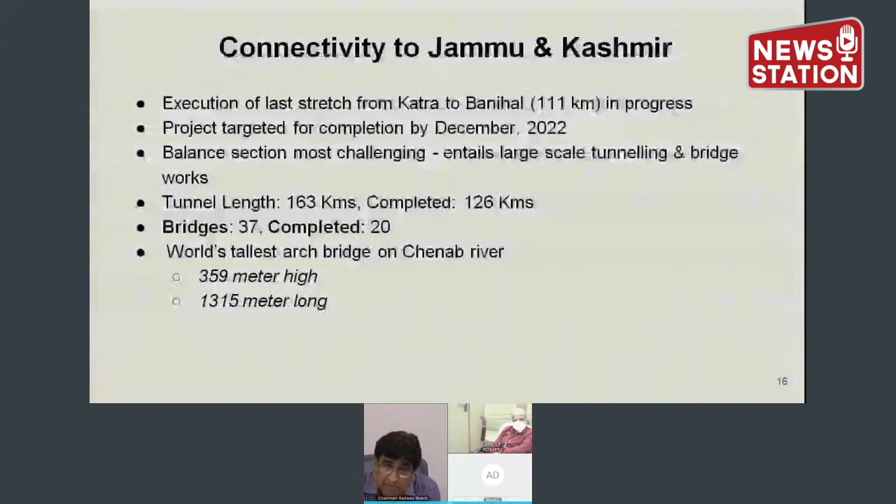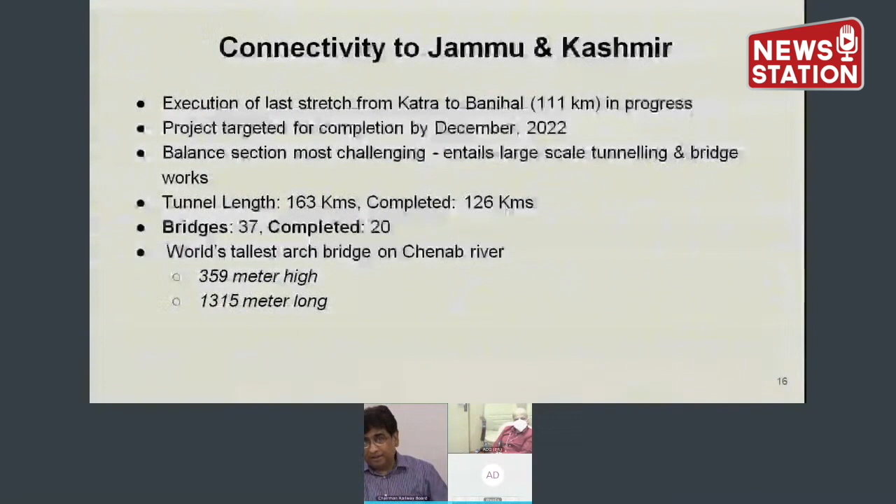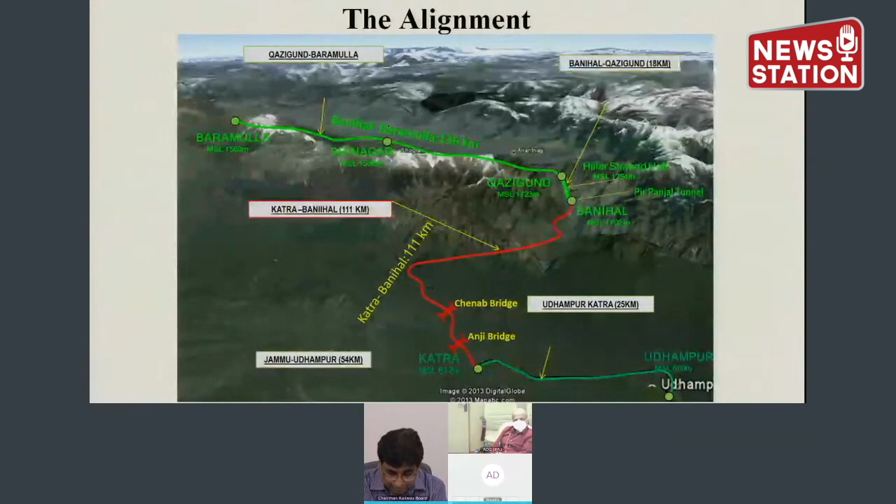And this terrain has two very important bridges. Once it is commissioned, the Chenab Bridge will become the world's tallest bridge, tallest arch bridge. It is 359 meter height, higher than the Eiffel Tower if you compare, and 1315 meter long. These are some of the pictures showing the alignment of the terrain, all hilly terrain.

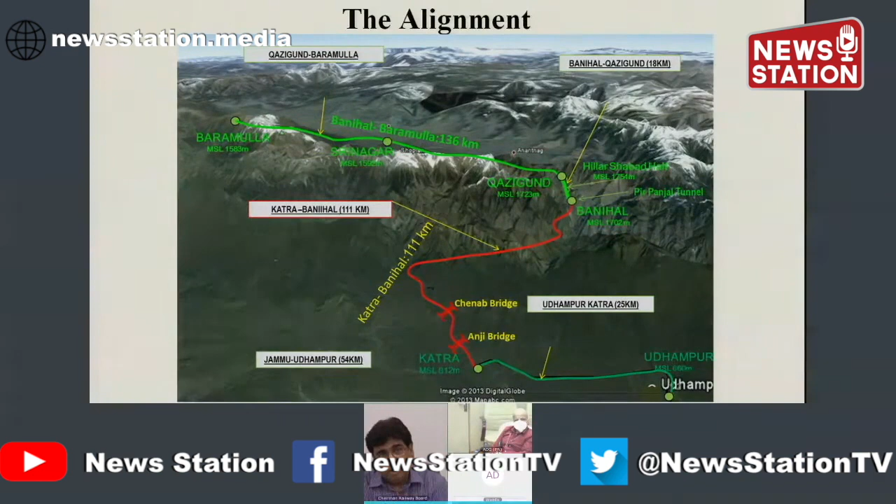The entire terrain is either tunnel or bridge. So 97 kilometer tunnel, you come out of the tunnel, you go to the bridge. You come out of the bridge, you go to the tunnel. So it's a very, very difficult terrain, but our Indian Railway engineers have done really marvelous work, and the project is going in full swing. These are some of the details that this work is going on.

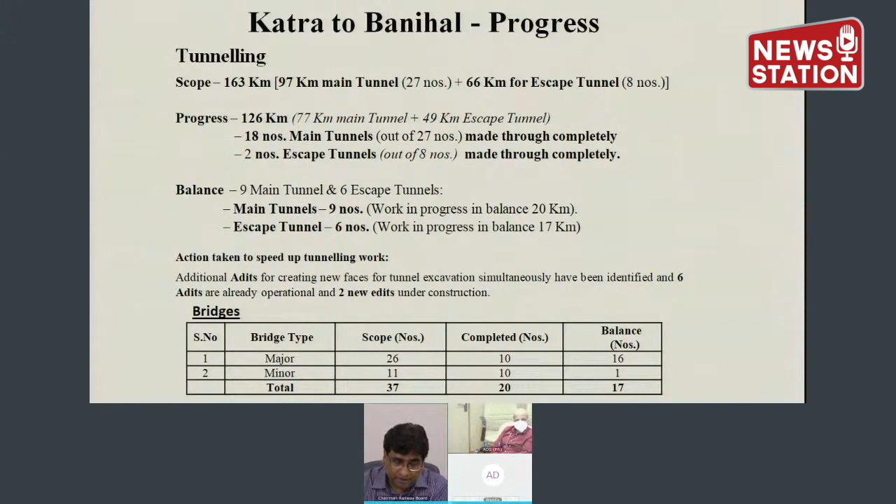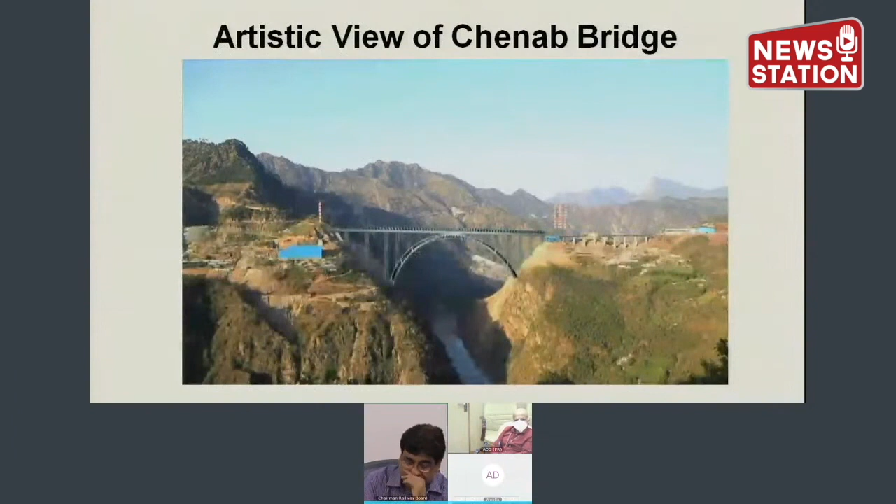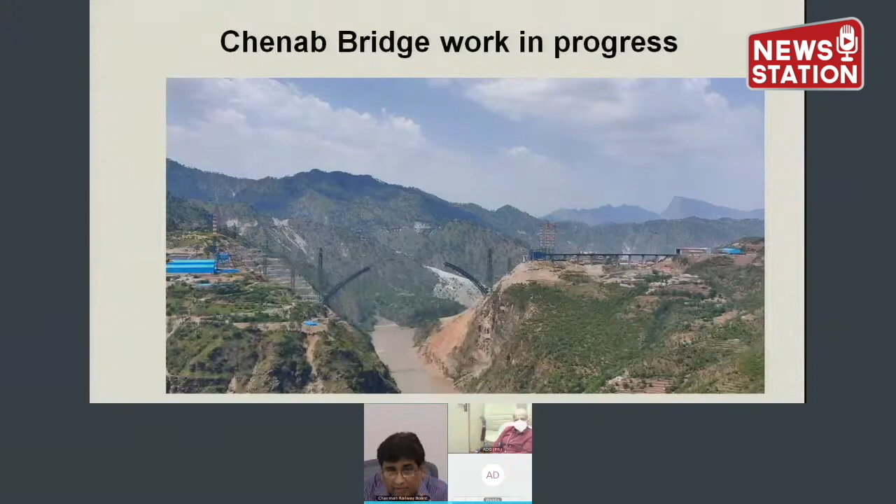And this is the view of Chenab Bridge. This is basically an artistic view. This is not the view at the ground right now, but it will look like this. And the next slide indicates the actual site work. Already a lot of work has been done. So this is actual site work, and it will look like what you have seen in the artistic view. This is Chenab Bridge work in progress.

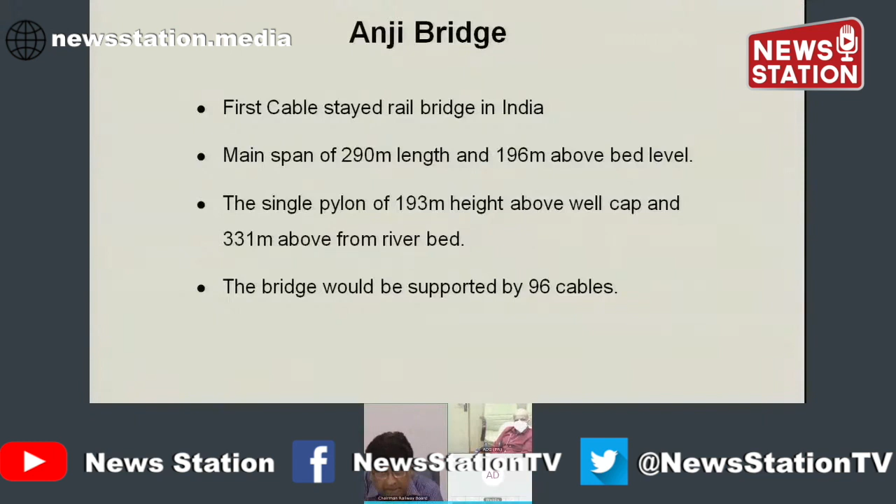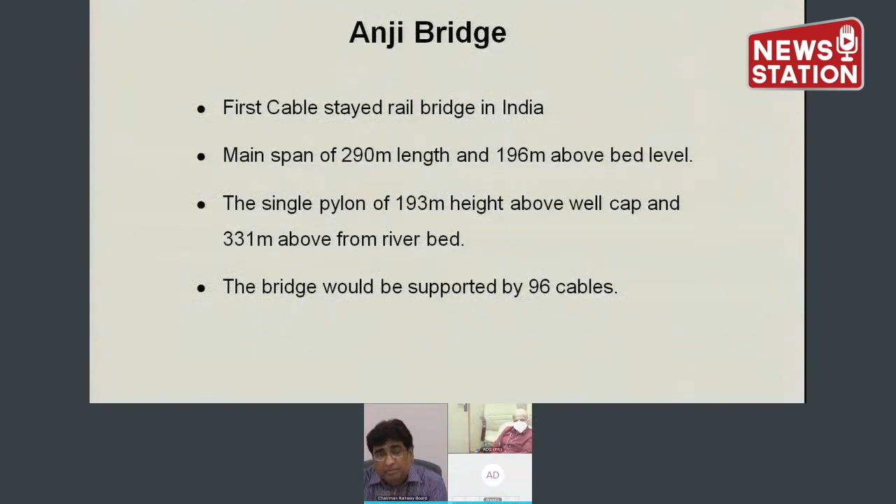Another bridge is Anji Bridge. It is the first cable-stayed rail bridge in India. The main span is 290 meter length, 196 meter above bed level. So this work is also progressing very well. These two bridges are the most important bridges. Basically, these two bridges define the completion of the project. They are on the critical path of the entire project, and that is why I am briefing you that these two bridges are going on very well.

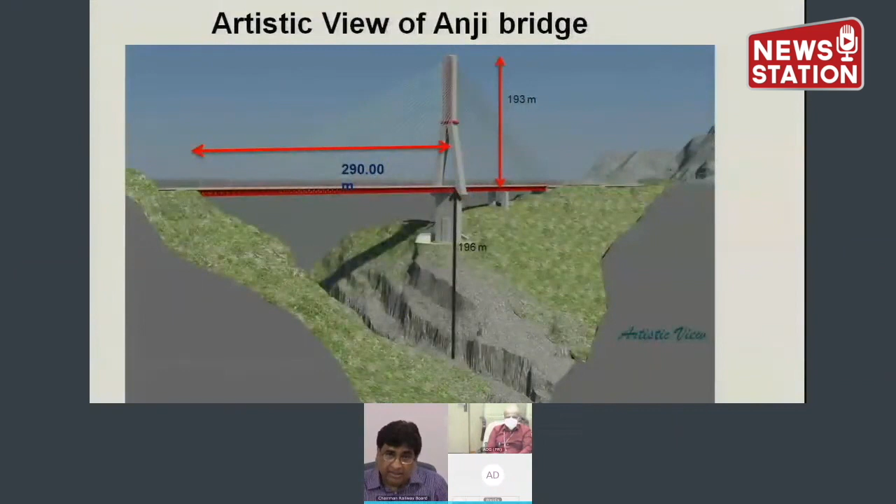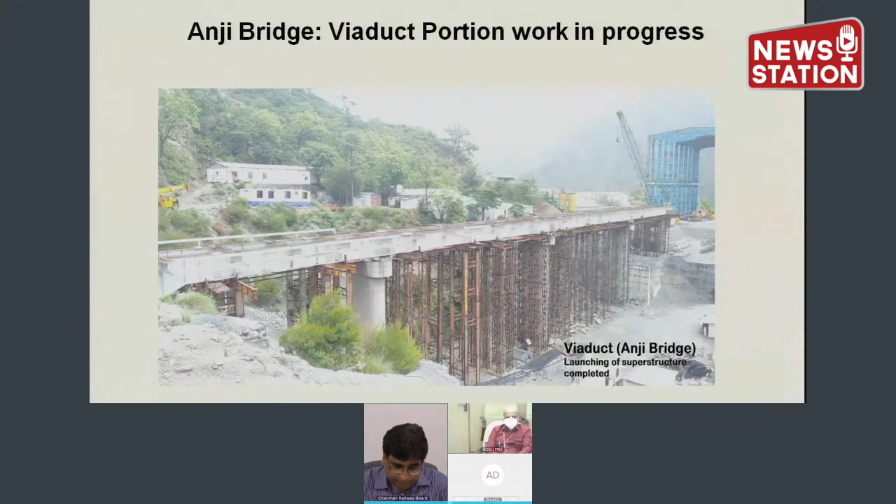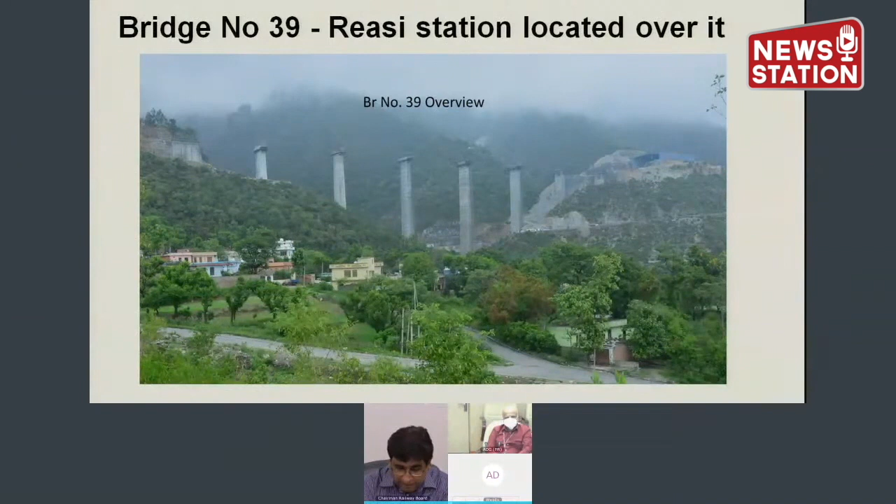This is again the artistic view of Anji Bridge. It will look like this once it is ready. You can see that the whole bridge will be supported on the cable. This picture shows the work in progress. Next picture also shows the work in progress. Another picture, there is a Reasi station which will be coming near the bridge. It's a beautiful view, and the work is progressing in full swing.

These are some of the substructures of the bridge 39. These bridge substructures have been completed. The bridge substructure takes most of the time for completion of a bridge. So all these substructures have already been completed. I just want to show you these pictures to give you confidence that these works are really in a very advanced stage and we are going to complete by December 22.

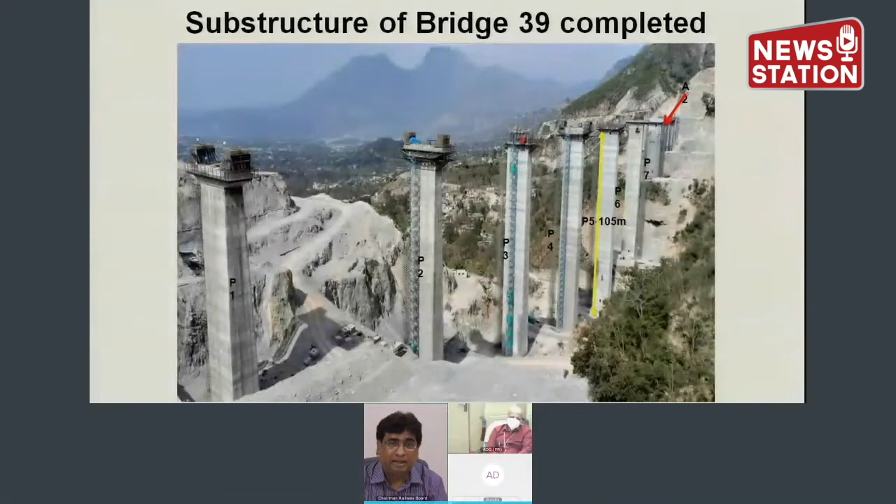Now these are some of the challenges, and the main thing which I would like to mention is that these sites are totally inaccessible, and for starting the work either at bridges or at tunnels, first of all, railway had to create more than 250 kilometer of motorable road, where we can move our trucks and our equipment, tunnel boring equipment, heavy bridge equipment. So Indian Railway has constructed more than 250 kilometer of road, and we will be handing those roads over once this line is commissioned.

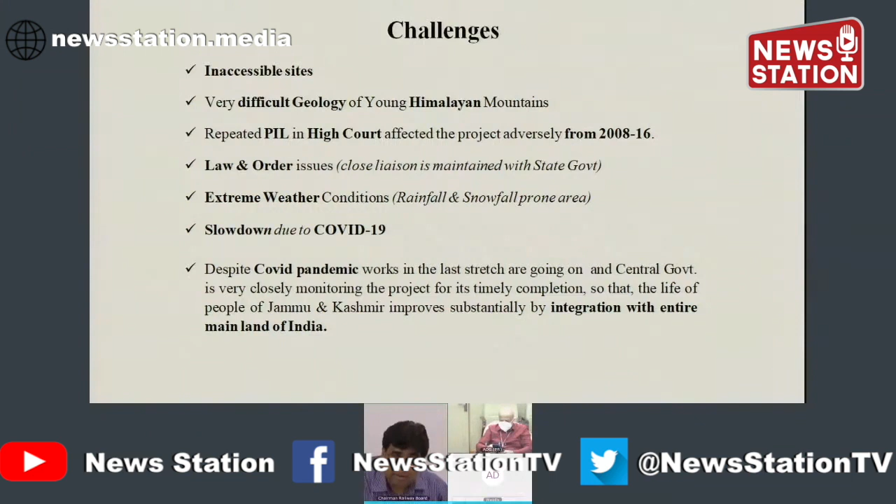Those roads can be used by the local people to provide accessibility to the remote area. So I would like to mention that in addition to the rail network we are talking about, 250 kilometer of very good quality road has also been provided as part of this railway project, which will be handed over to the state government and is really going to help the local people. And during this COVID period, we have been able to pick up our work. The progress is very good, and we are quite confident that we will be able to complete this project by December 22.